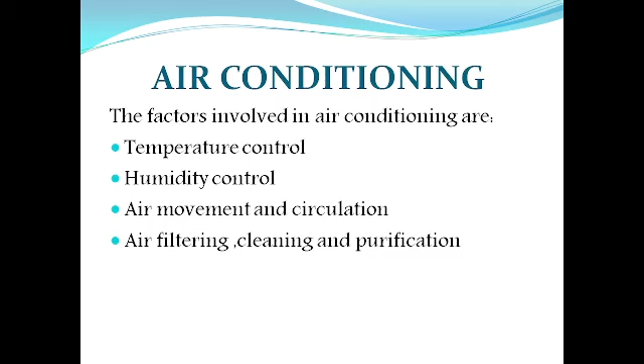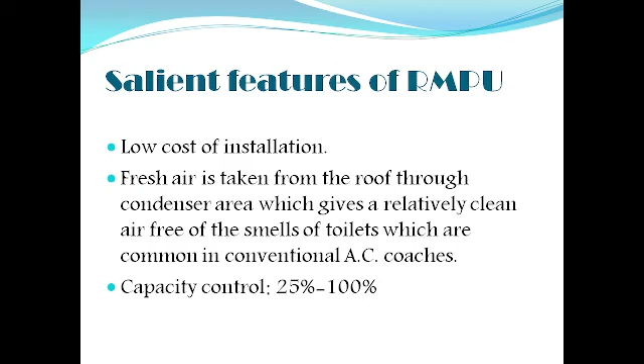Salient features of RMPU. Low cost of installation. Fresh air is taken from the roof through the condenser area, which gives relatively clean air free of the smells of toilets, which are common in conventional AC coaches. Capacity control 25% to 100%.

No chance of damage due to flash floods during the monsoons. No chance of damage due to cattle runover. It is energy efficient. It is mounted on the roof, thus dirt or dust collection in condensers is negligible.

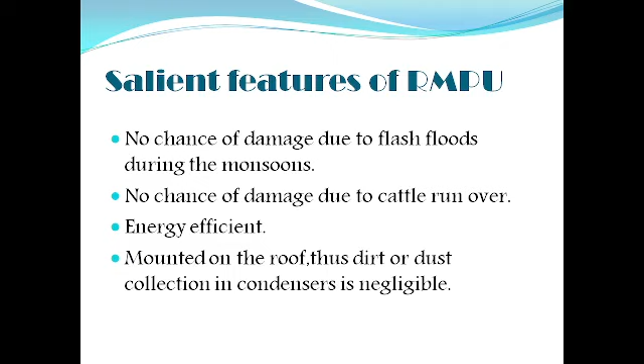This is the refrigeration system in RMPU coaches. A short description of the refrigerant cycle. Here, the refrigerant is compressed by the compressor, thereby increasing gas temperature higher than the outside ambient temperature. This hot compressed refrigerant vapor is injected into the tubes of the condenser coil. Air is blown across the condenser coil, causing the refrigerant to cool down and therefore condense from vapor to liquid refrigerant

inside the condenser tubes. The high pressure condensed liquid refrigerant flows through the capillary tube. The other end of the capillary is connected to the tubes of the evaporator coil. The other end of the evaporator coil is connected to the suction port of the compressor through the accumulator, which sucks the refrigerant and drops pressure inside the evaporator coil. Drop in pressure causes evaporation of the liquid refrigerant to gas, which makes the evaporator coil extremely cool due to loss of heat on account of vaporization.

Air to be cooled is blown across the evaporator coil. The heat from this air is absorbed by the evaporating refrigerant, causing the air to cool down. This chilled air is blown through the supply air duct to inside the coach.

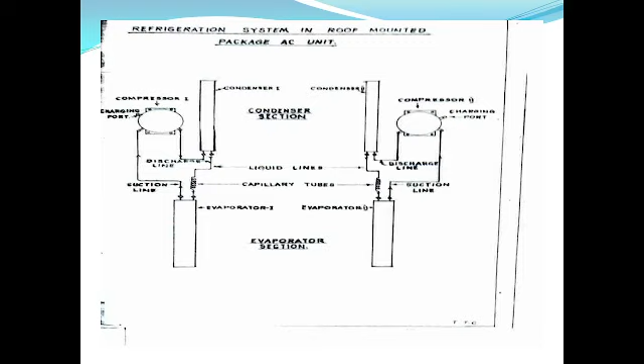Now, let us see some causes of less cooling. Choked filters, less refrigerant, mesh block, ETS failure, damaged canvas, more gap in the AC cabin access door. The choked filters: clean the filters, replace if necessary. Next one, less gas: gas leak to be identified and rectified. Follow RDSO SMI AC 14.

Mesh block, clean with water jet. For ETS failure, check for correct working, replace if found defective. Damaged canvas: replace the canvas with double layered canvas. The last one, more gap in the AC cabin access door. For this, inform the mechanical counterpart to provide rubber beading or any other arrangement for covering the gap.

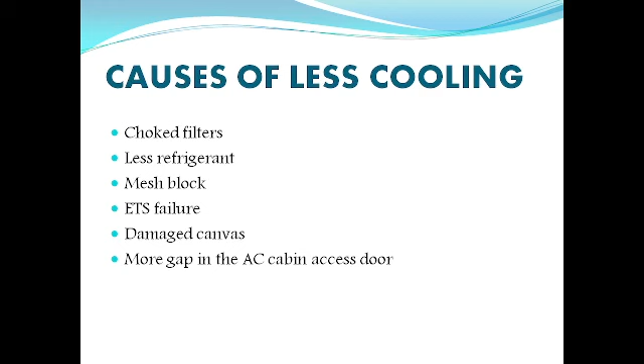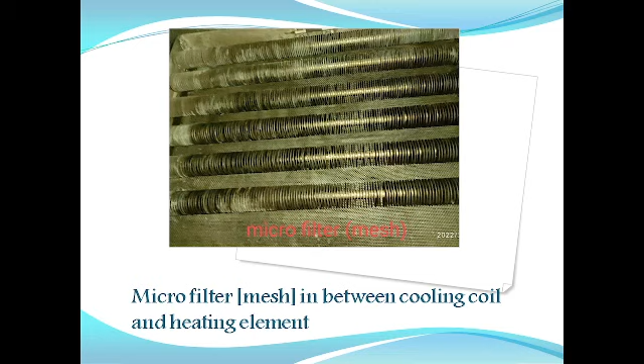This is the image of the microfilter between cooling coil and heating element. Here we can see the gap in the cabin door.

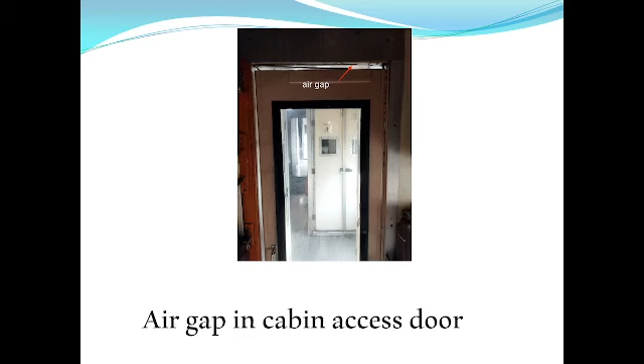RMPU maintenance contracts are taken up by different firms in all the divisions. So, insist they adhere to RDSO specs for carrying out maintenance. Some of them are listed. RDSO ACMS 26 is for ensuring the working of RMPU in the event of failure of one condenser fan motor. RDSO SMI AC Note 5 advocates dehydration of the refrigeration system, prevention of ingression of moisture.

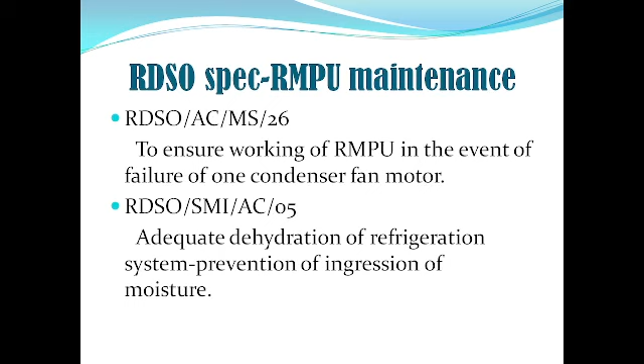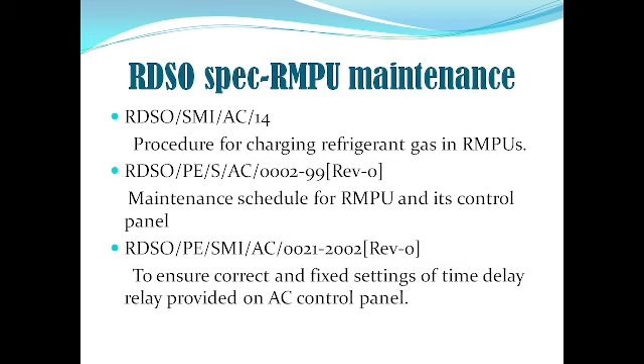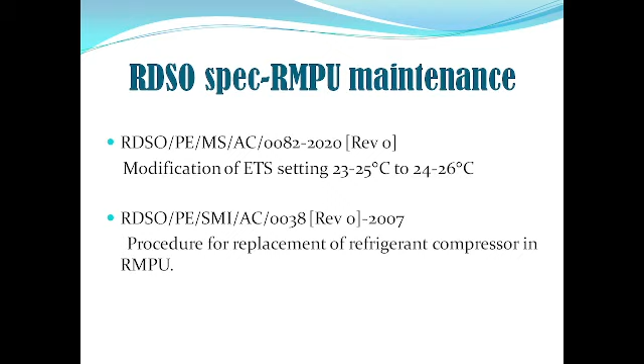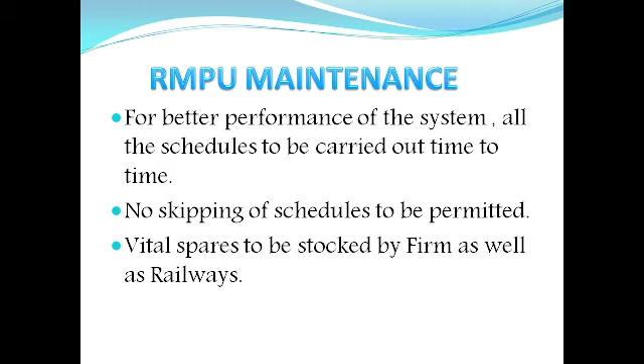RMPU maintenance. For better performance of the system, all the schedules to be carried out time to time. No skipping of schedules to be permitted. Vital spares to be stocked by firm as well as railways. Some of the vital spares are given.

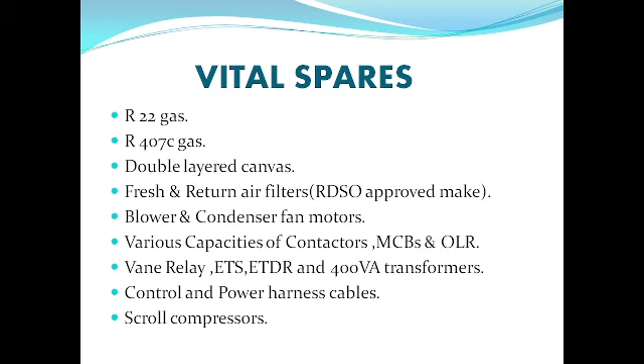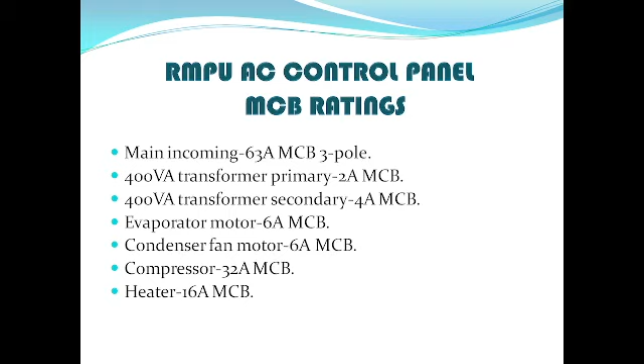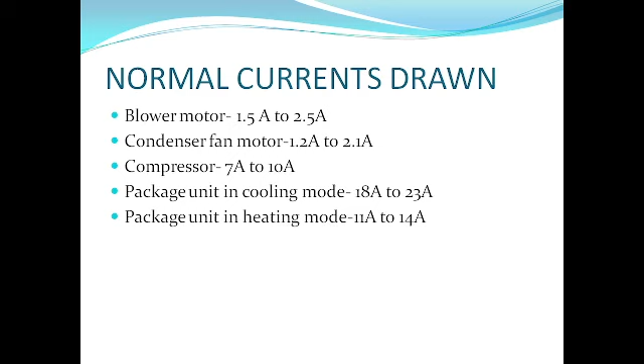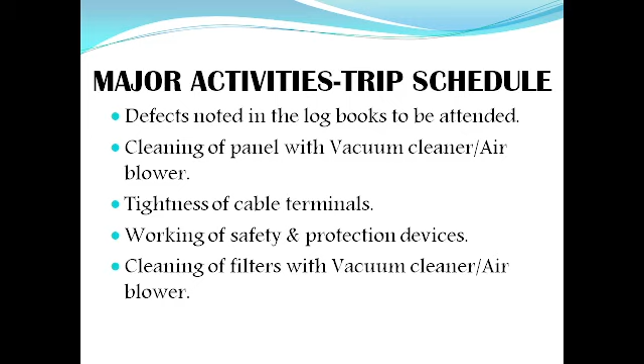Various maintenance schedules for RMPU: trip schedule, monthly schedule, 3 monthly schedule, 6 monthly schedule, IOH or 9 monthly schedule. Major activities performed in trip schedule. Defects noted in the logbooks to be attended. Cleaning of panel with a vacuum cleaner or air blower. Check the tightness of cable terminals. Working of safety and protection devices. Cleaning of filters with a vacuum cleaner or air blower.

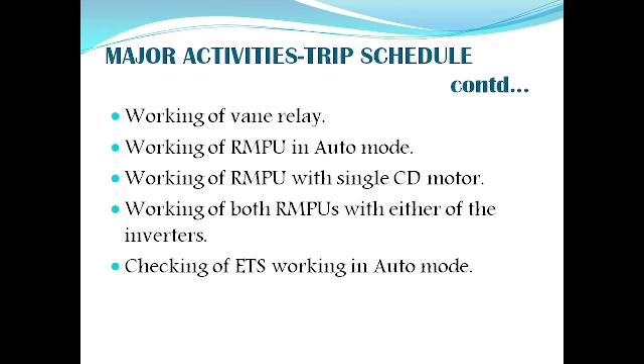Working of vane relay to be ensured. Working of RMPU in auto mode. Working of RMPU with single CD motor. Working of both RMPUs with either of the inverters. Checking of ETS working in auto mode. Tripping of HP and LP cutouts. LP setting 35 psi, HP setting 400 psi.

For checking the LP tripping of compressors, first short vane relay, that is 4446 in control harness cable, then switch on compressor with blower fan off from its MCB. Keep the unit in run condition. The compressor should trip within 10 minutes.

For checking HP tripping of compressors, switch on compressor with the condenser fan motor off from its MCB. Keep the unit in run condition. The compressor should trip within 10 minutes. In case of less cooling, leak detection and gas charging as per SMI 14.

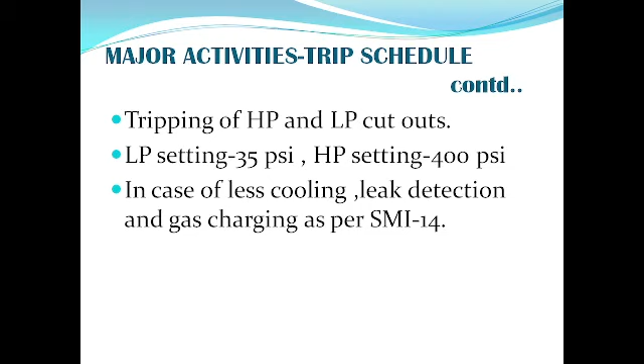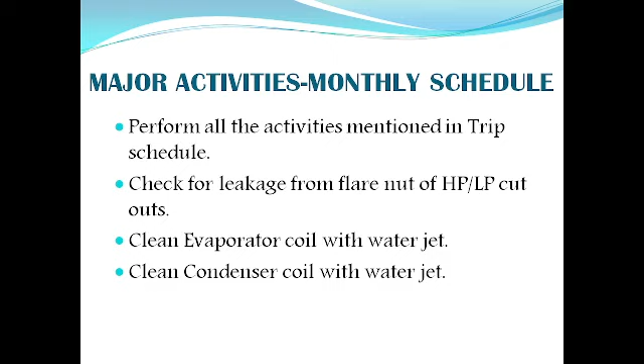Major activities performed in monthly schedule. In addition to the trip schedule, the following activities are also to be performed. Check for leakage from flare nut of HP or LP cutouts. Clean evaporator coil with the water jet. Clean condenser coil with the water jet.

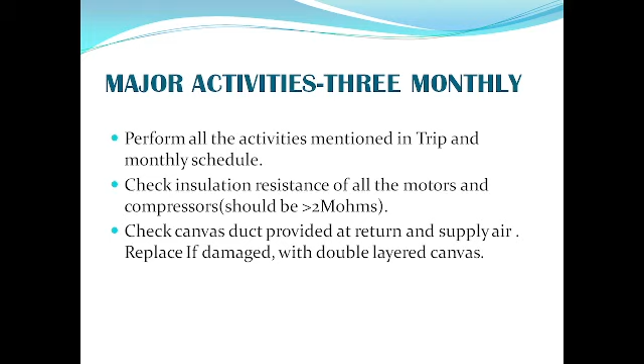3 monthly schedule. In addition to the trip and monthly schedule, the following activities are also to be performed. Check insulation resistance of all the motors and compressors. It should be above 2 mega ohms. Check canvas duct provided at return and supply air. Replace if damaged with double layered canvas.

6 monthly schedule. In addition to trip, monthly and 3 monthly schedule, the following items should also be checked. Check double earthing shunts in control panel and RMPU. Replace SS blades by FRP blades of condenser fans.

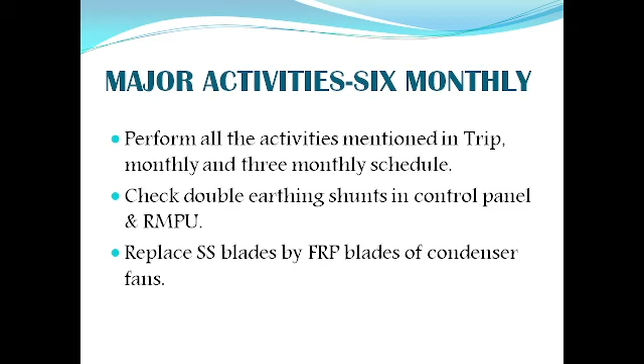Next one, 9 monthly or IOH schedule. In addition to trip, monthly, 3 monthly and 6 monthly, the following items should also be checked. Ensure there is no crack in structure of RMPU. Cleaning of canvas duct between return air grill and evaporator compartment. All filters to be replaced with the new one.

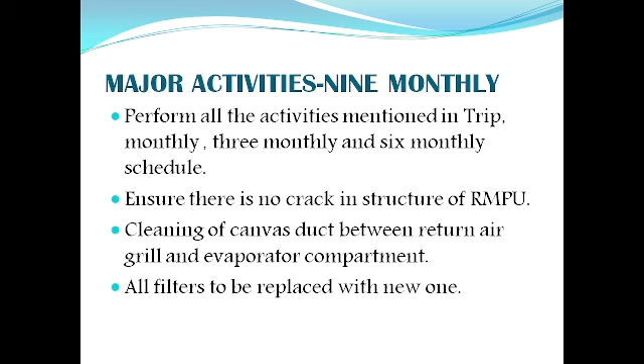Some suggestions. At present, as there are no window curtains in AC coaches due to COVID pandemic, temperature inside the coach is high. It is due to the modified settings of ETS, that is 24 to 26 degrees Celsius by RDSO modification number RDSO PMS AC 00822020 revision 0 due to COVID pandemic.

Now, as the third wave is almost over, ETS temperature to be modified with the permission of Ministry of Health to previous settings, that is 23-25 degrees Celsius, in order to avoid passenger complaints. In every trip maintenance, condenser coil to be cleaned in the month of March to July. Cleaning of condenser coil in every trip using water jet from the month of March to July, irrespective of schedules, is already given in the contract agreement of Messrs. Sidwal, Palakkad Division.

Let us now watch a video showing some major activities performed during RMPU maintenance.